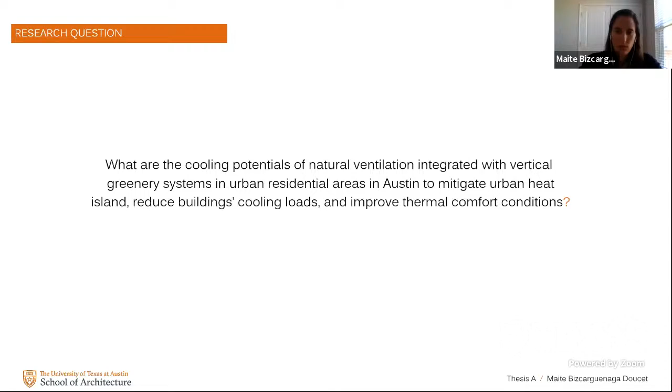My main topic of research is the cooling potentials of natural ventilation integrated with vertical greenery systems. My advisors are Dr. Faulkner and Dr. Vajreshwari. My main research question is: what are the cooling potentials of natural ventilation integrated with vertical greenery systems in urban residential areas in Austin to mitigate urban heat island, reduce buildings' cooling loads, and improve thermal comfort conditions?

My methodology was, this semester, focusing on the research and lit review, trying to analyze climate change, urban heat island, passive design strategies, greenery systems, and natural ventilation, and figure out and select my specific site to be analyzed. Next semester I will move on to modeling and simulation with IES VE software, starting with modeling the existing site conditions, then my retrofit proposals, and finally the simulation results, analysis, and conclusions.

For this presentation, I'm going to start with the problem and why this research matters, talking about climate change and urban heat island and their impacts on ourselves and the environment. Then I'll talk about the building typology I've chosen, why I chose this residential single-family retrofit project specifically, and explain my methodology for finding the site. I'll talk a bit about the proposal, mainly focusing on greenery systems and green walls, and conclude with my future steps.

Throughout the presentation, I'm going to take you through different scales, starting with the world perspective, going into cities, into neighborhoods, and all the way down to a single building. So to start with the problem: the Earth, our planet, is heating up, and it's heating up really fast.

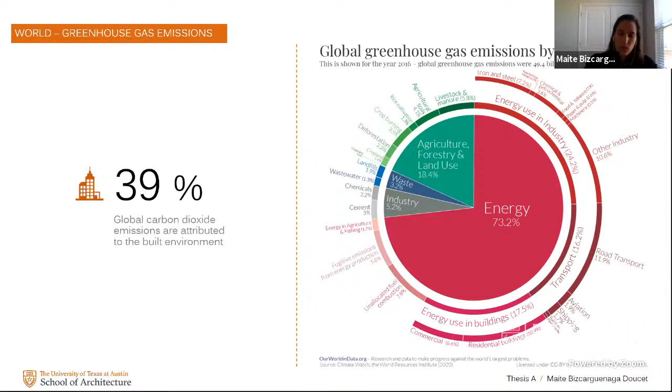As you can see in the graph here, energy is largely responsible for this, and 39% of global carbon dioxide emissions are attributed to the built environment. So we really need to take a hard look at the way we are building our cities and designing our buildings. This has caused long-term changes to our weather.

We have seen these extreme weather events with major increases in wildfires, in heat waves, in drought, with a 50% increase in severe storms, and floods—major floods have more than doubled.

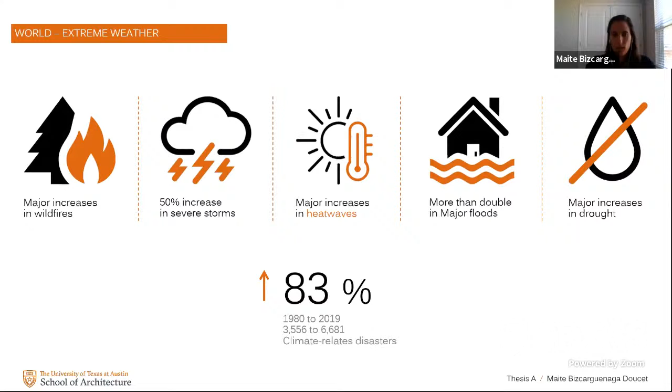With 7.8 billion people on the planet and 55% of the world population living in urban areas, this is really changing the way our environment is working. It's really the growing population density simply exacerbating environmental degradation, and with cities expanding and making more room for impervious cover, there's less space for nature.

Cities are particularly impacted by the urban heat island effect, which refers to higher temperatures registered in urban areas compared to their corresponding surrounding suburban and rural areas. This is largely due to land surface modification, human activity, vehicles, buildings, and materials, which differ greatly from the ones that we find in nature.

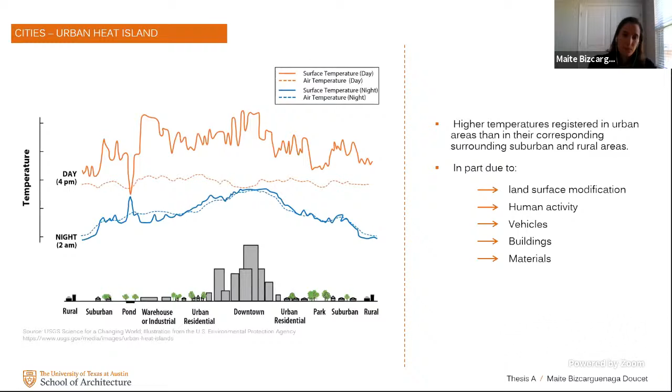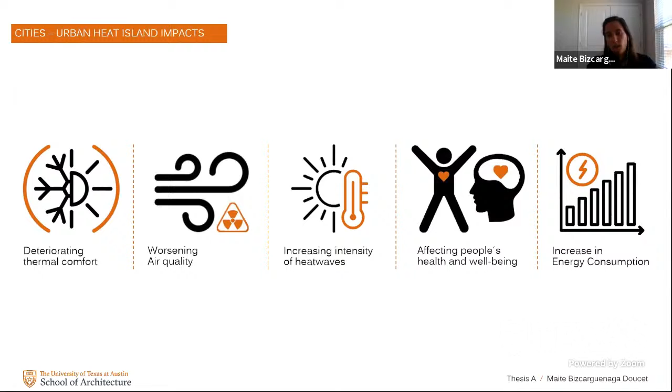This is really impacting us. It's affecting people's health and well-being, deteriorating thermal comfort, worsening air quality, increasing the intensity of heat waves, and really increasing our energy consumption.

The US has the third largest population, with 80% of its population living in urban areas, in more than 310 cities with population over 100,000 people or more. It's really, really important that we take a hard look and try to make cities a better place to live.

With about 140 million buildings in the US, while it's important to look forward and design better buildings and better cities going forward, it's also very important to look back at what we've done and the damage we have done, and retrofit the existing stock. That's why I think retrofitting is so important, and what better place to start than our homes?

So that's what takes me into residential buildings, to understand a little bit more. Residential buildings are among the top energy consumption sectors. As you can see in the US, while renewable energy has been increasing, it's still really dominated by fossil fuels, and residential is no different.

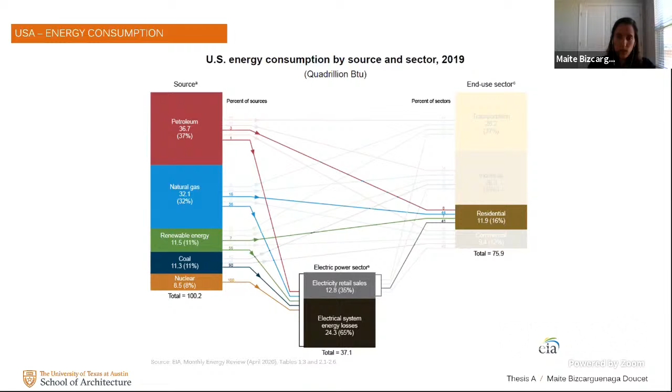Only over 7% of the energy used in residential is renewable energy, so we really need to understand and find ways to reduce that. Looking exactly at how it is that we are consuming energy in our homes, 32% is attributed to the HVAC system, for both heating and cooling purposes, being the largest energy consumer.

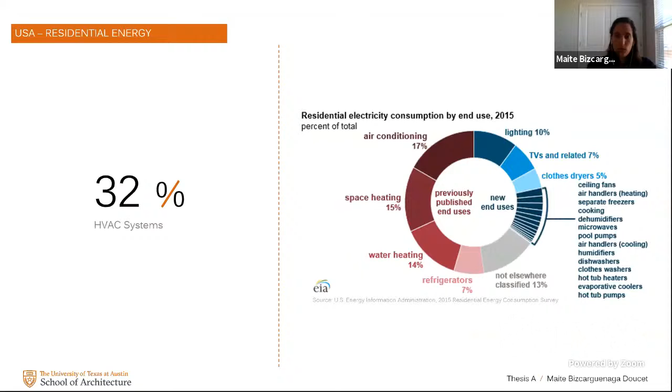In a survey done in 2015 by the Energy Information Administration, 1 in 3 households reported facing a challenge in meeting energy needs, and 11% reported keeping their homes at an unhealthy or unsafe temperature. This really shows how impactful and meaningful it is to go back and look at our homes, finding different ways to both retrofit them and implement passive design strategies to improve thermal comfort—reducing temperatures during the summer and increasing them during the winter.

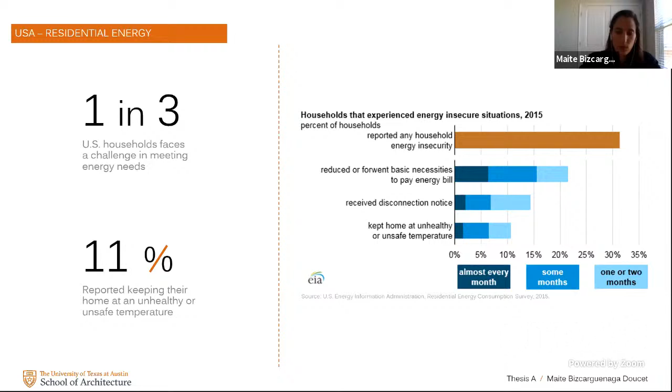That takes me to the site selection. So as I mentioned, I'm looking at Austin.

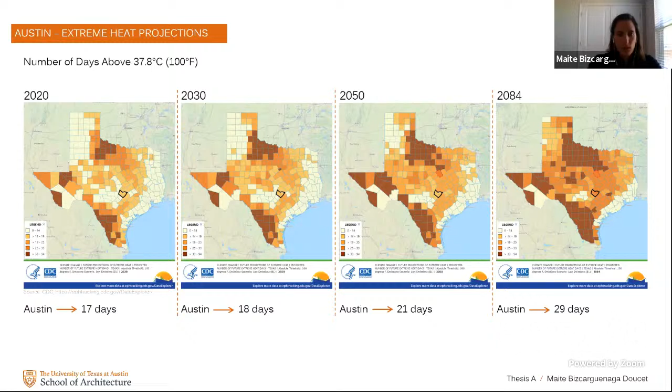Austin is considered to be a humid subtropical climate, categorized by long, hot summers, short, mild winters, and warm spring and fall transitional seasons. It's basically a cooling dominated climate, which with global warming is just going to continue to get hotter and hotter. As we can see from the projections from the CDC, the number of days above 37.8 degrees Celsius, the consecutive days above this temperature, are just going to continue to increase, making it very important to find different ways to cool our neighborhoods and our buildings.

That took me to this very interesting analysis by Bixler and Yang of climate vulnerability in Austin, a multi-risk assessment, where they analyzed the social vulnerability of the population in Austin, trying to understand where it was located, looking at people's age, income, education levels, and so on. On the other hand, they looked at the places that were receiving more heat, and matched that with places that had less tree cover, putting together those two indexes to create a comprehensive heat risk and social vulnerability index that I analyzed.

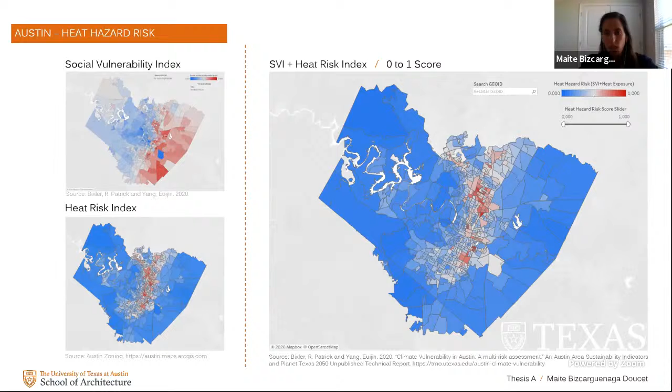I took that map and that research and overlaid it with the current zoning for Austin, because I wanted to understand where the single family areas were that were most impacted by heat and by social vulnerability.

So these are the ones when looking at the score. The Bixler and Yang index has a score of 0 to 1, 1 being the highest degree of vulnerability. I started by analyzing places that were in the 0.5 to 1 range. You can see, no surprise, it's closer to downtown and the more urban areas. I then increased it to 0.6 to try and reduce the number of areas and find a single one. That gave me 67 census block groups with a total population of 143,000 people and 52,000 residential units.

I really wanted to continue to narrow down and find a single location. To do so, I looked at the mean population and mean residential units by census block and eliminated the ones at both ends to try and find a more representative block. I also eliminated from the map locations that had only the social vulnerability index below 0.5, or only the heat risk below 0.5. That led me to these 26 census blocks.

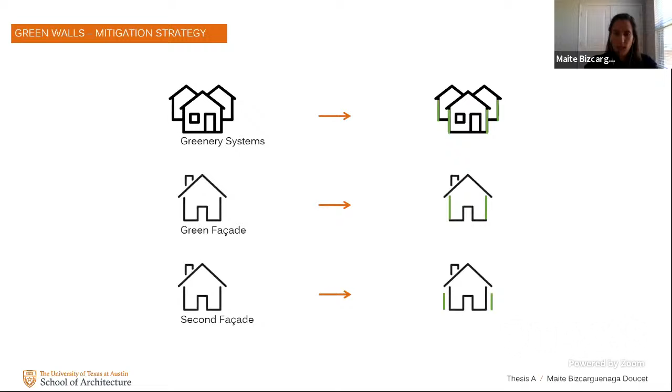I want to understand this shading and this second skin, and what the temperature will be between the facade and the green wall, and how the air that could flow in between would or wouldn't help reduce the heat that the house absorbs, therefore reducing its cooling loads.

So finally, my future steps are modeling this through ENVI-met software to really analyze this idea that I have. I'll be modeling the site, as I mentioned, and then modeling these different retrofit proposals and reaching my conclusions next semester.

For general anticipated findings, I expect the added greenery to reduce the urban heat island effect and improve the exterior air temperature, therefore improving the cooling potential of natural ventilation, decreasing the building cooling energy load, improving the environmental footprint of buildings, and overall improving human and other species' health and well-being. That is my general concept.

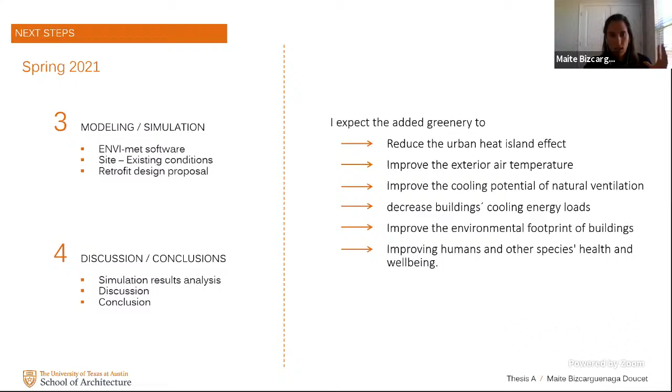Thank you. Great work, Maite. Thank you.

Could you go back to your site screen? Yes, or slide? This one? Yeah, I couldn't—on this one I know what site you're talking about, but I couldn't see the street names. Maybe for the others, you could describe a little more exactly where this is in Austin.

Yes, so let me go back here, downtown. So UT is about here, downtown is right there. So it's this little area right there, between First and 5th Street, and between Chicon Street and Pleasant Valley. Thank you. Yeah, no problem.

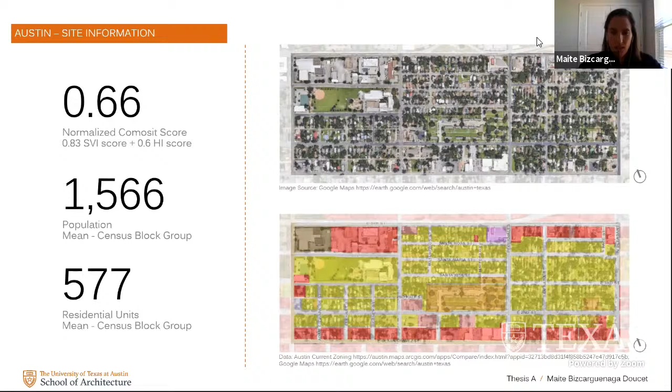Which my site, I guess, if I had any questions or wanted to pick your brains, would be a little bit on the site—if I go back a couple of slides, even if I go maybe here. I ended up choosing, so I narrowed down the different locations kind of very methodically, but when I really got to this last couple of spaces, of course I'm looking at single family residential, and that's the typology and the buildings I've chosen to analyze.

So that's why I ended up choosing that specific site, because it does have a commercial area, but it's not as big as—if you can see these sites up here, more to the north, they have a really big part of that area that has commercial, or big box areas. So this section right here has a big sports academy or something like that. It does make sense that the places most impacted by heat would be next to these big box or commercial areas, because they have such a big impervious cover for parking.

In that sense, it truly makes sense that this would be the area most impacted. I ended up choosing the other one because it had more single family homes, but ultimately maybe it makes sense to look at this other site—even though I'm not really trying to focus on commercial, it almost seems like the places more impacted by heat are commercial areas, more so than residential, which also makes sense, since you have front yards here and trees and whatnot.

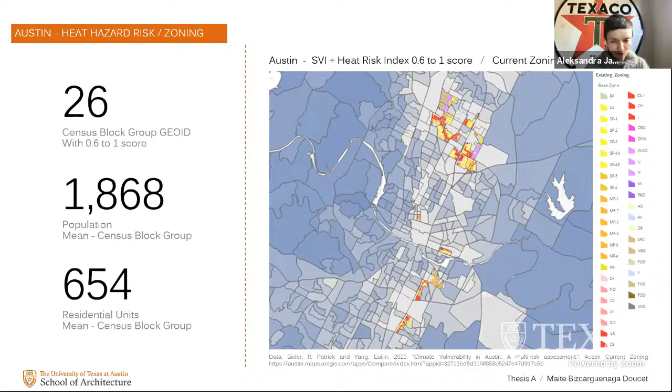Very useful, thank you so much. And definitely the cost is something that has been very present on my mind, I think, even looking at how people can't afford to pay their bills and everything. Reskinning the whole building and making it super airtight and changing your HVAC and doing all these things - those are all fantastic if you can afford it, if you have the time, if you can do that.

So I do think we need to find non-invasive ways to retrofit our buildings, and the wider range of possible solutions and passive design solutions that we can offer, maybe the more people really can start implementing them. And that is - definitely the cost is something that's really been on my mind. That's also why I'm not really looking at living walls, and focusing more on green facades.

It also has to do with the cost, so that's definitely a big part of it. I do need to start looking a lot more into ENVI-met, and that would be my next step—to really analyze how accurate it is and exactly how I'm going to be able to measure all that.

You should mention, Maite, she just got the software—she and Diamond—through a Green Fund grant, so they're just now going to start using it. They haven't had a lot of experience with it yet, but they've done a lot of research and a very thorough literature review about other projects using this software in order to calibrate it a little bit.

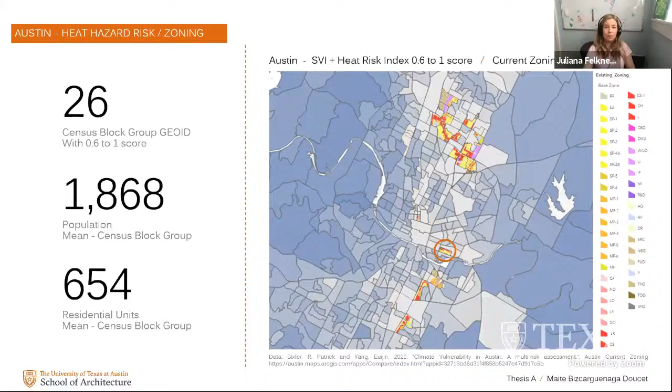I mean, here you expect that heat to happen, so you're better prepared than they are. And there's actually a higher rate of mortality, and people are highly impacted in those locations. So kind of looking at it from different views and different needs and comparing the two, I find to be super interesting. And I would love to have the time, but I'm not sure I'm going to have the time to look at it. Well, you've already done it in your lit review, and you've discovered that dynamic systems, so you can change between winter and summer for such cases, could be useful.

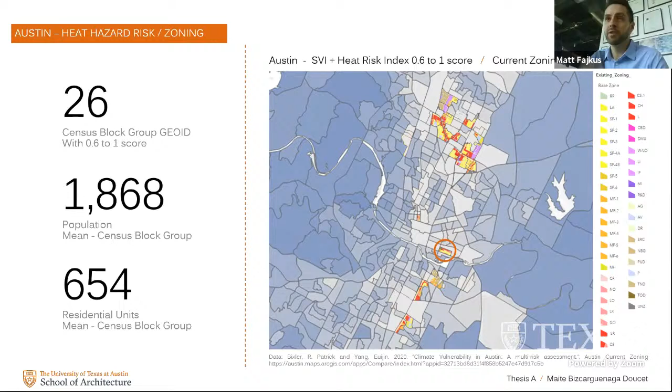If you could just sort of show some... I guess the part of the question is, is it a proportional relationship? That is, you add X amount of greenery and it keeps going the same way. Or is there maybe some sort of way that it begins to exponentially increase, having more impact, or the opposite, the temperature exponentially decreasing? If you just add a bit more greenery, that might be a very interesting conclusion to arrive at, or to disprove what I'm hypothesizing. Yes, definitely, we'll look at it that way. Thank you, great.

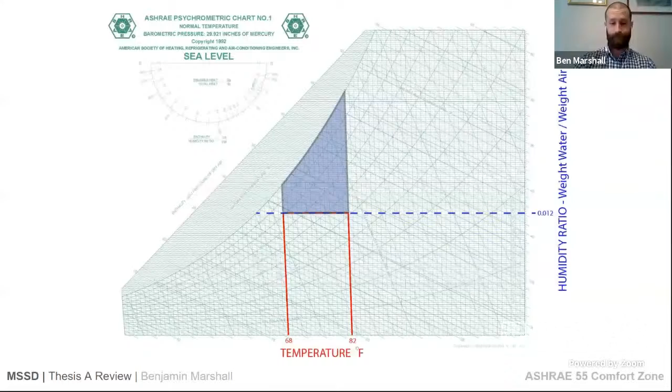Some of the other problems would include mold. Mold likes a lot of our building materials, and it needs to be humid to grow. It needs water to grow, and it also likes dim light, but that's for another study. The mold not only can degrade the building materials, but it also releases spores, which is bad for air quality. You get lots of people who are allergic to mold, I've got a good friend who's allergic to black mold, and it also gives you asthma and that sort of thing. You also can get water damage. If you get condensation on your building materials, it might not grow mold, it might just get water damage, which will degrade your gypsum board and other materials in your building construction.

So how do we get rid of this water vapor in the air currently? We use something called the vapor compression cycle for the most part. There are a couple different systems, but the vapor compression cycle is the most common for residential houses. How it works is that you pump refrigerant around a circle. You have an evaporator, which is the coldest one down here at the bottom, it is colder.

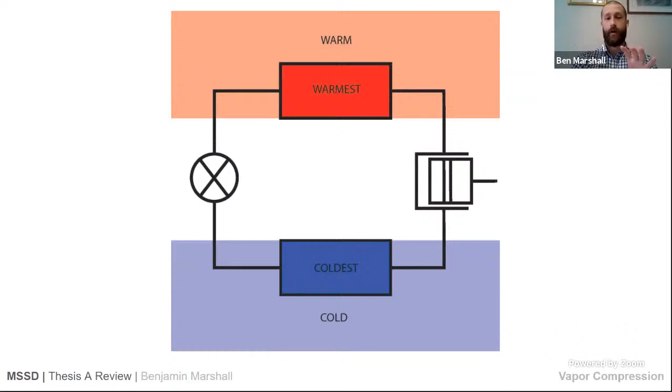The reason this works for dehumidification is condensation. Whenever the coil in your evaporator is colder than the air, water condenses on that coil and it pulls the humidity out of the air.

There are other ways to do it. Desiccants are one. If you've ever bought a pair of shoes, it probably has a little pack you shouldn't eat. Looks like a peck of salt, but it's actually silica beads - those are solid desiccants.

What we do in these situations is have a wheel that air with really high humidity is blown through. Those desiccants absorb it. Then as the wheel turns, the exhaust air from your building gets blown through those same beads as it rotates through, and it evaporates that stored water. But you have to add heat to do this.

Liquid desiccants are a similar process. They're just a solution - salt water, if very salty, will absorb water out of the air.

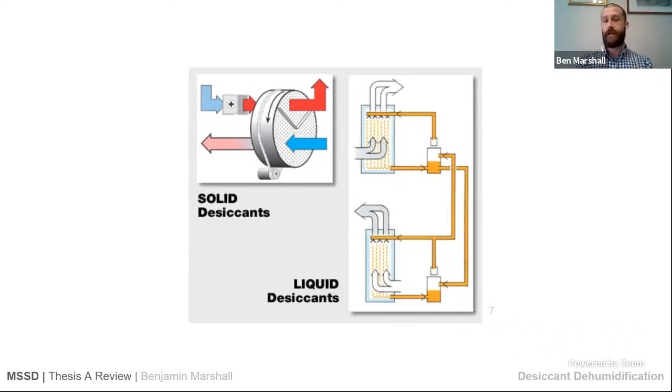It's a little bit better - actually supposed to be 60% better. The desiccant cooling is 60% better than vapor compression cooling.

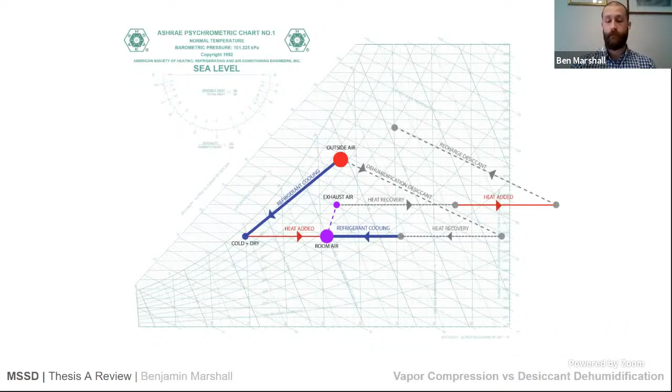But I think there might be another way. First, why do we dehumidify without cooling? Why would we use desiccants over vapor compression?

Well, efficiency is one thing. There are several technologies out there that don't do dehumidification, but are more efficient than our current air system.

Air is not very dense - you can move your hands through it. Water is a lot more dense, which means you need a lot less of it to move a ton of energy around. There are three different types of energy movement: convection, conduction, and radiation.

This is great, but it doesn't deal with humidity, and that's why a separated system that deals with humidity might make this a viable thing for hot and humid climates, which would save a lot of energy.

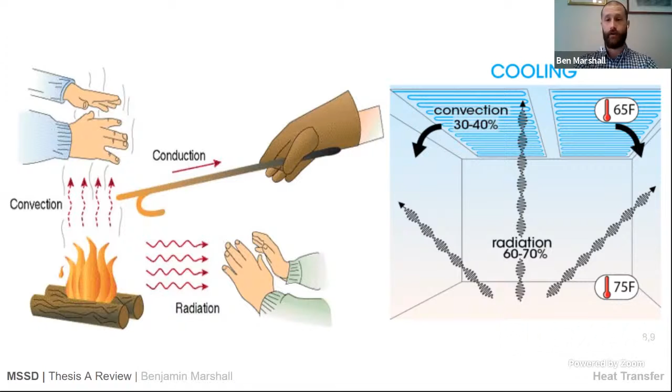This is some radiative panels - they look just like ceiling panels you'd have in your office, but they are your whole thermal comfort system, not just air conditioning. So it can be integrated into architecture very elegantly.

Another system is the TAC wall system developed by NREL, the National Renewable Energy Lab, and Oak Ridge National Lab. It's a series of pipes inside your exterior wall that turn your whole wall into a heat exchanger. If you set up your insulation correctly, you can direct heat from the exterior to the pipes rather than all the way through into the interior, which would decrease your heating and cooling costs.

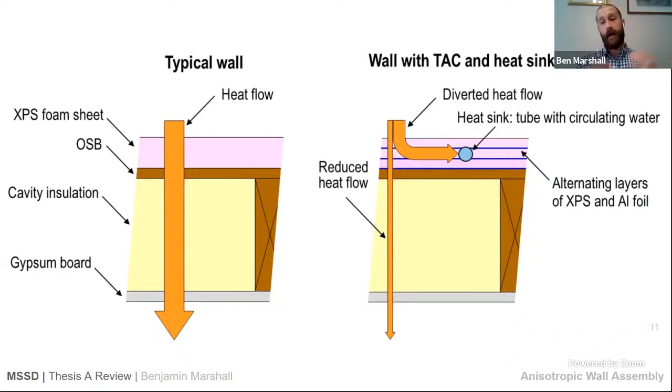But it doesn't have a way to deal with humidity.

Another reason we want to separate dehumidification from the standard vapor compression cycle is because there's a lot of time in the year where the temperature falls right where you want it, and you have to subcool that air before it can be reheated up to your room temperature. So you're losing a lot of energy.

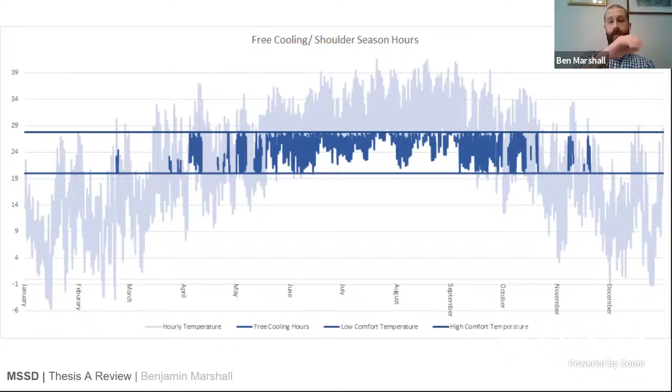We have about a 13% difference in the worst case scenario, which is the A2 scenario, but it's still a large chunk of the hours of the year in which this free cooling is available.

So how do we solve this dehumidification problem differently than the way desiccants have done it? Well, maybe nature has a way that it's already been solved. Throughout history, people have looked at nature and said that's already been solved by nature. Let's just try to figure out the principles behind how nature does what it does.

So lotus leaves, these are super hydrophobic, which means they don't like water. Phobic means not liking or scared of. And so water beads up on the surface and rolls right off. And there are already some coatings that do this.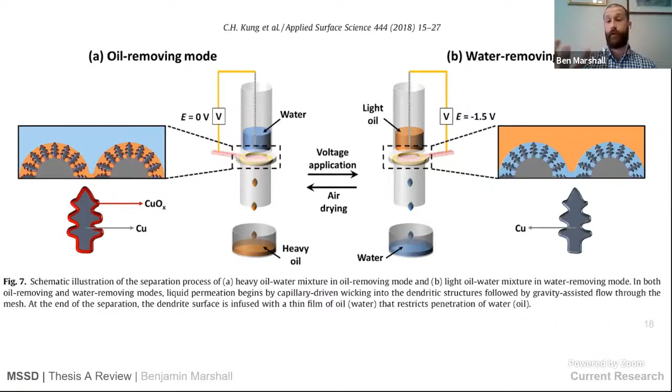It really likes water. It pulls water into the mesh. It does it by this quick formula. Fairly simple: you add the 2 electrons, it breaks them apart, and you start to get some negative hydroxide ions, and everything kind of pulls in towards that mesh.

So what about being able to, it's great if we can just soak some water in, but what about getting rid of the water? Well, the hope of my research is that there is an electrical perfect spot where you can cycle between super hydrophobic and super hydrophilic properties of this mesh, so that the water pulling in gets pushed out, forms droplets, and gravity starts to pull it down the mesh, and it drains away just with the force of gravity.

This shows the test that they did on their mesh sample, and there is such a point where if you modulate the frequency, it looks like around 7 or so hertz, that's cycles per second, you get this effect.

And at around 30 to 32 phase angle, you can get it to cycle between the two.

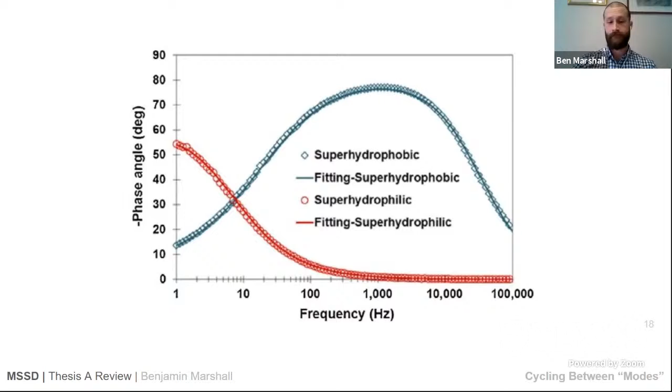So what have I done to date to start this? Well, I got a mini materials grant from the School of Architecture, and they bought these materials for me to start making this mesh. I have made some for testing.

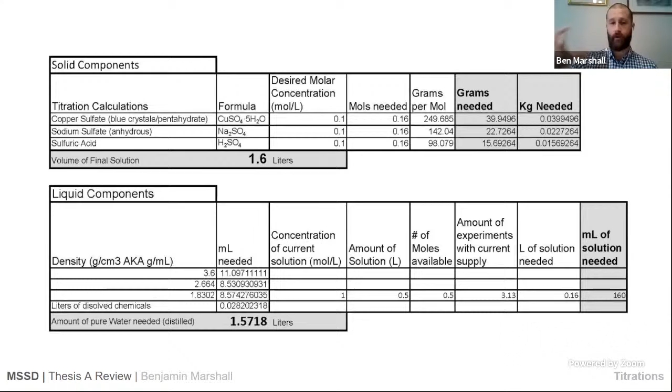So I figured out, based on the paper, how much I needed per batch. Here are some titration calculations. Filled it all up.

Mixing it up outside. I'm wearing a mask because I'm dealing with some sulfuric acid. It's very mild, but it is just a little bit, so that's why we did it outside and I wore a mask.

So we've got a DC power supply. We're using it to supply the correct amount of electricity that the researchers in Canada used to make their mesh. And we've got samples—these ended up being correct as far as the electrolyte solution. I also have a bunch more samples that were an incorrect solution, but I kept them around because if I have time, I'd like to test them as well.

And I'm in the process of building a testing apparatus, which is fairly simple. It's two pieces of PVC and a blast gate, similar to what you'd have in a shop, so you can close off or open vacuum to a tool to suck away your dust.

And I've got a little signal generator there, and I'm going to use that to do the Hertz calculation, or the Hertz experiment, like I mentioned earlier.

I'm working on developing with my cousin, who's got a 3D printer, a little blast gate that I can use to put the samples in and electrify them. You can see those two channels for electrical wires so that I can run them to the signal generator.

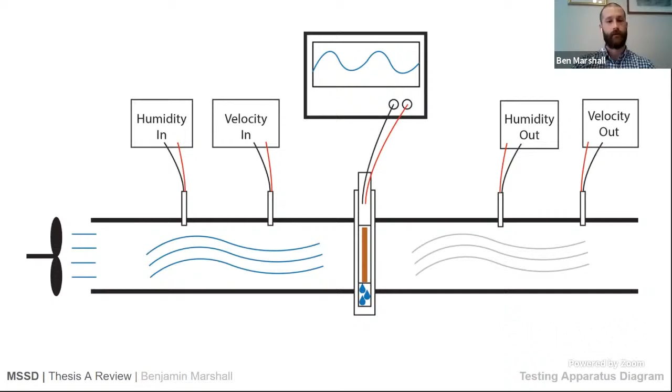All right, so this is the School of Architecture, not a school of material science. So how does this apply to architecture? Well, there are architects who think that the skin of the building should be a big part of how we treat the outside, maybe how we do the structure—the skin of the building is the most important part. I am beginning to think that way as well.

Here are a few examples of projects that touch on this. One from our own Professor Ficus, for his firm's submission to the Habitat for Humanity 20 by 20 dwelling, in which these blocks on the outside not only form a screen for privacy and light modulation, but also filter air.

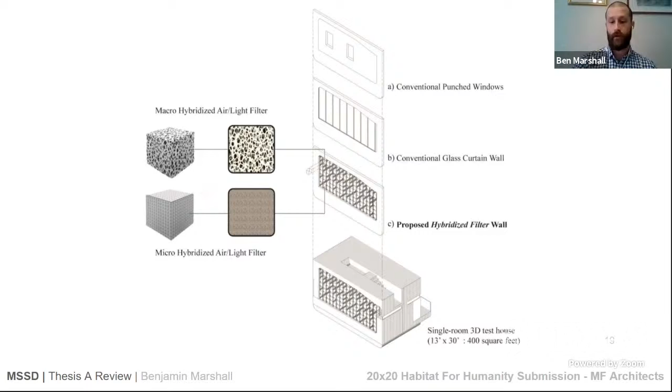This is all kind of in theory. One building that has gotten built, which uses the skin as the interface for thermal comfort, is the Philologische Bibliothek in Berlin. This is by Norman Foster, and the skin of the building is where they have the lights and the HVAC system and that sort of thing—it's the structure for the building.

So I think it'd be great to have this screen system that I am researching be integrated into the architectural aesthetics of a building, and not just stuck away inside some closet somewhere where you can't see it.

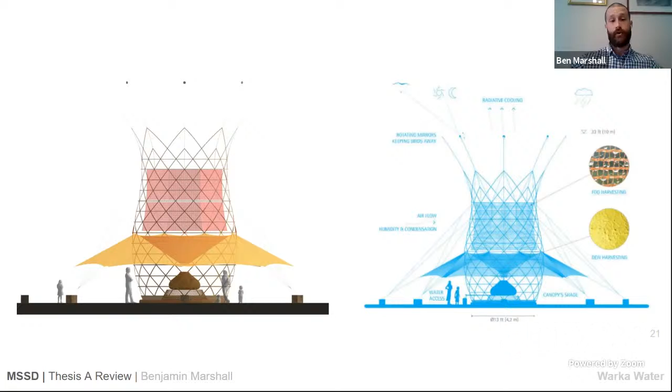Also, another way this material may be used is for water harvesting. There are a lot of places far from water where people have to walk a long way to get to it. This is a project by Warka Water, in which they made, not only in digital form but also physical form, architectural installations that collect water for the village.

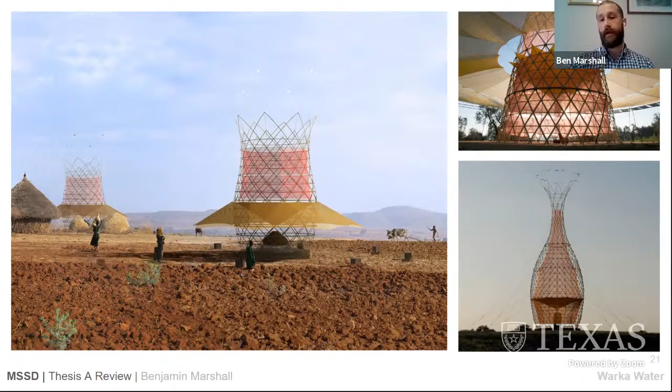The two on the right are in-place installations in which this netting is used to capture fog and provide water for the village, so people don't have to walk so far to get to water. Another is a fog tower, which is architectural, not really supposed to be lived in—I think this is more for agricultural purposes.

But that is my project to date. Any questions?

Ben, could you clarify what that scale jump was? A big scale jump from the experiments up to what you showed for some of the case studies. Do you imagine that your final output would be... I guess there's two ways to ask this question. More fundamentally, I'm asking, how much more of the experimentation do you imagine doing?

Are you suggesting that it would be somewhat of an analogous exercise, or some sort of metaphor that's scaled up to the building size or building scale? Or is it possible that you imagine developing it at this very small scale that could be just literally applied and scaled up as a building skin? It's unclear to me offhand what you imagine the final output to be, exactly how far you're getting with the material study, which is really interesting, by the way.

And the argument, the way you build up to the argument that you're making, all of that was convincing. The most unresolved or unclear part is the last bit with the case studies, which are also interesting, but not as clear of a continuum, as though you were then trying to make that leap that maybe you don't. Well, I'll stop leading the witness here and just let you answer that question, and then I might give you some thoughts on that.

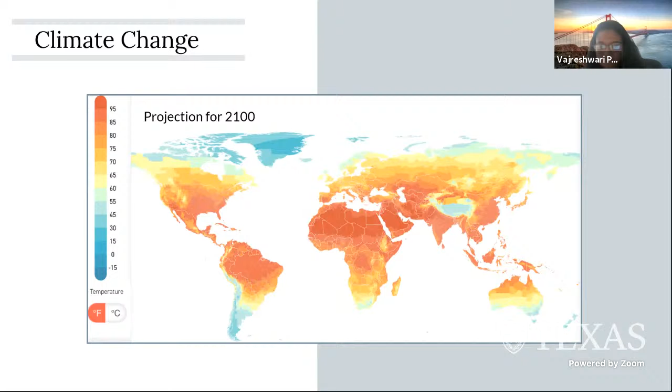Next is population projection. The global population is projected to surpass 8 billion by 2030 and hit 9.8 billion by 2050. The growth of urbanization has been extensively accelerating, and 50% of the world population lives in urban areas. India will soon become the most populated country in the world, with population expected to grow until mid-century, increasing to 1.6 billion by 2050, and 70% of that increase will be in urban areas. According to research, this phenomenon could cause disasters in low altitude areas in Asia, which are expected to experience rapid population increase.

Greenhouse gas emission: today we collectively emit around 50 billion tons of CO2 each year, 40% higher compared to 1990, and 73% of it is from the energy sector. In terms of CO2 emission, India is the 3rd largest emitter of greenhouse gas after China and the USA. Continued high emission of greenhouse gas is projected to lead to a 4 degree Celsius rise in average annual temperature in India by 2100.

Coming to energy consumption, the global average per capita energy consumption has been consistently increasing, by approximately 45%.

The fastest growing building energy consumption through 2040 will occur in India. Delivered energy consumption for residential and commercial buildings in India is expected to increase by an average of 2.7% per year between 2015 and 2040, more than twice the global average increase.

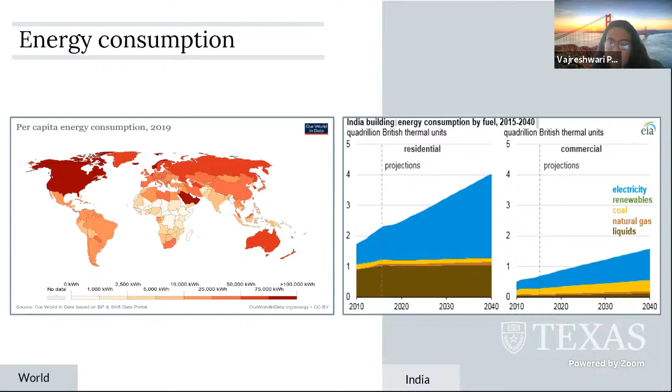Air conditioning is a major consumer of energy in the residential and commercial sector in India. Looking into the air conditioning system in India, about 2.8 billion people living in the hottest parts of the world, only 8% has air conditioning, compared to 90% of the people in US and Japan. India has among the most cooling degree days in the world, more than 3,000 per year.

Household ownership of AC in India is merely 7%, that is approximately 20 million, and demand is expected to increase to over 1 billion by 2050. But many devices will be low cost and inefficient models that will only consume more energy, powered by fossil fuels that will contribute to global warming.

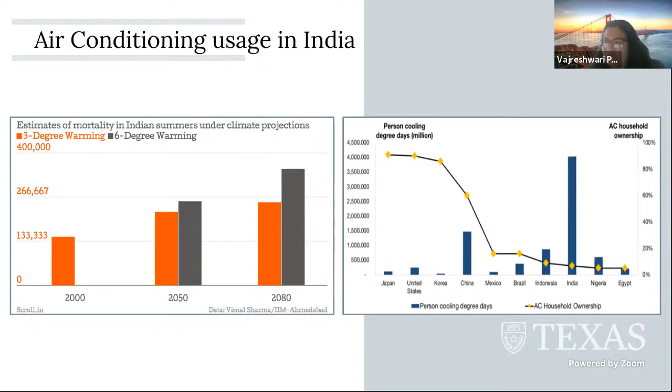Air conditioning currently accounts for about 40 to 60% of power demand in summers in major Indian cities. India contributed 5% of global annual emissions from ACs in 2019, predicted to account for 25% of annual emissions by 2050. So what is the urban heat island effect?

All these parameters led me to look into the urban heat island effect that major cities are experiencing. As you know, urban heat island effect is best visualized as a dome of stagnant warm air over heavily built up areas, and majority of the cities are around 2 degrees Celsius warmer than rural areas, with commercial and high density residential areas hotter by 5 to 7 degrees Celsius.

Looking into the causes of UHI, there are many causes like low albedo materials, heat loss from street canyons caused by the obstruction of sky by buildings, trees and other objects, air pollution in the urban atmosphere, the release of anthropogenic heat, the heat storage capacity of building materials, and decreased evaporation.

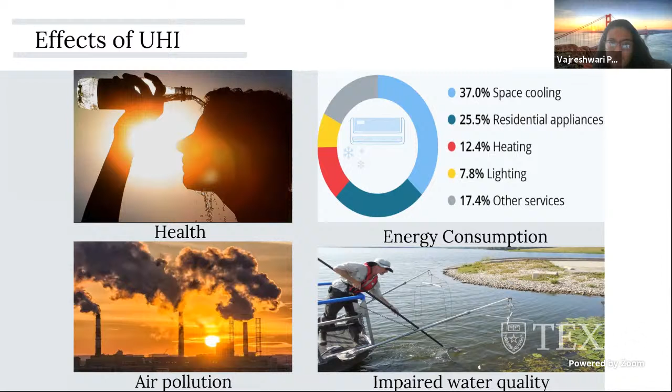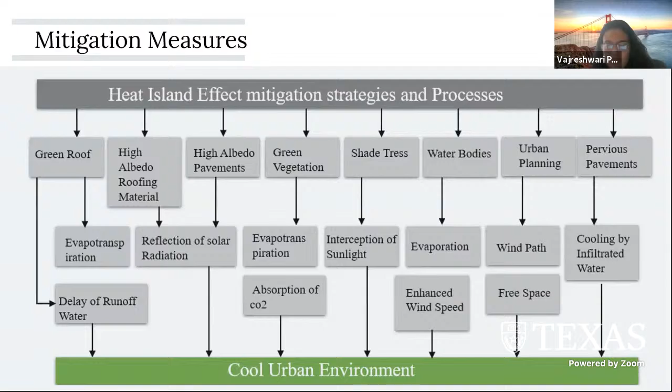There are many effects of UHI: health effects, energy demand, impaired water quality, and air pollution and greenhouse gas emissions. Looking into mitigation strategies, there are many adopted for UHI, but more specifically I'm looking into green roof vegetation.

Then looking into the material on the surface, and third would be the urban geometry. Coming to vegetation, I want to look into the green roof.

According to the study, the surface temperature of an individual green roof can be reduced by 15 to 45 degrees Celsius compared to conventional non-green roofs, and the nearby air temperature could be reduced by 2 to 5 degrees Celsius, and could also reach 80% depending on the building type.

If extensive use of green roofs is undertaken in urban areas, the air temperature at pedestrian level could reduce by 0.5 to 1.7 degrees Celsius. Looking into the tree shadow advantage, tree-shaded streets could reduce air temperature between 0.9 to 2.6 degrees Celsius.

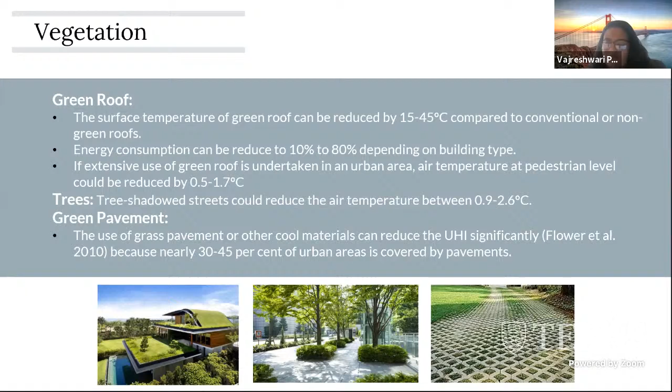The highest benefit of shadow provided by trees is improving local thermal comfort during daytime, especially in tropical and subtropical regions. Regarding green pavement, urban pavements are generally made of materials that can reach peak summer temperatures of 50 to 70 degrees Celsius. The use of grass pavement or other cool materials may reduce UHI significantly because nearly 30 to 45% of urban area is covered by pavements.

Looking into materials, cool pavements have several advantages - they are able to keep urban temperature lower overnight - and cool roofs. Studies have shown that the expected decrease rate of urban ambient temperature varies between 0.12 and 0.2K per 0.1 increase in roof albedo, with a value close to 0.2K.

Looking into urban geometry, urban canyons can reduce total energy consumption by 30% in commercial buildings and 19% in residential buildings. Indoor and outdoor temperature difference shown by a study can peak at 5.4 degrees Celsius for unshaded buildings, while tree-shaded buildings did not exceed 2.4 degrees Celsius. A study established that street design influenced thermal comfort at pedestrian level and global energy consumption for urban buildings.

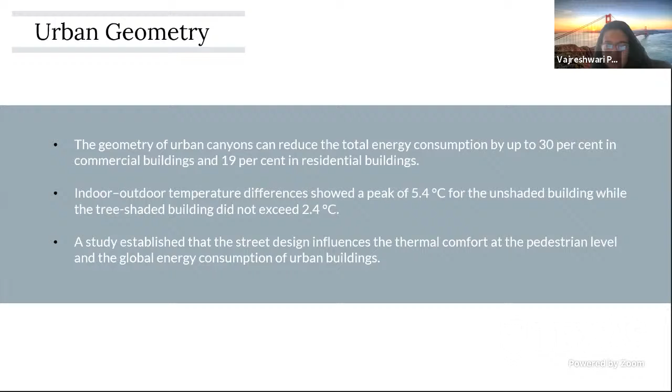Now comes to the site which I've chosen, that is Bangalore, situated in India. Bangalore is located in India, it is one of the fastest growing cities, and it is the Silicon Valley of India with rapid growth in information technology, biotechnology, and manufacturing sectors.

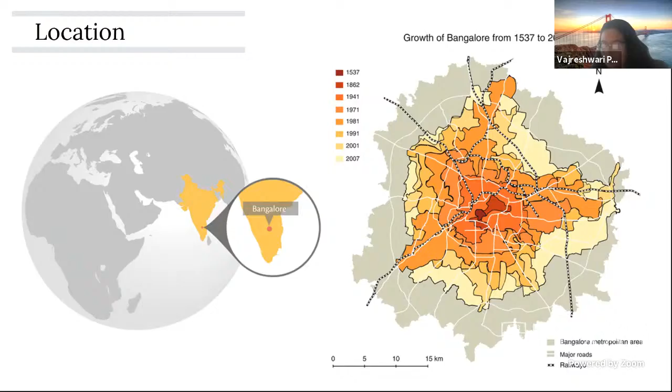About 35% of the IT workforce works in Bangalore, and the spatial extent of the city increased from 226 square miles in 1949 to 286 square miles in 2020. These are some images just to show the sense of the city.

Coming to the climate, the city is placed in a warm, humid climate zone, and Bangalore has a tropical savanna climate with distinct wet and dry seasons, with an annual rainfall of 35.6 inches. Due to high elevation, that is 900 meters above sea level, the city usually enjoys a more moderate climate throughout the year. The coolest month is January with an average low temperature of 15 degrees Celsius, and the hottest month is April with a high temperature of 35 degrees Celsius.

The average annual percentage of humidity is 63%, but it varies from 32% in the month of March to 87% in August and September.

So if you look at the population, in 2020 the current population is about 12.3 million, and a 3 to 4% increase is happening each year. By 2031, the city will have 20.3 million people. Population density is approximately 6,500 people per square mile.

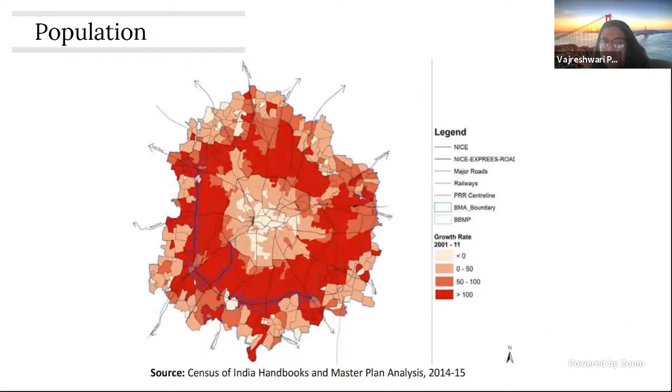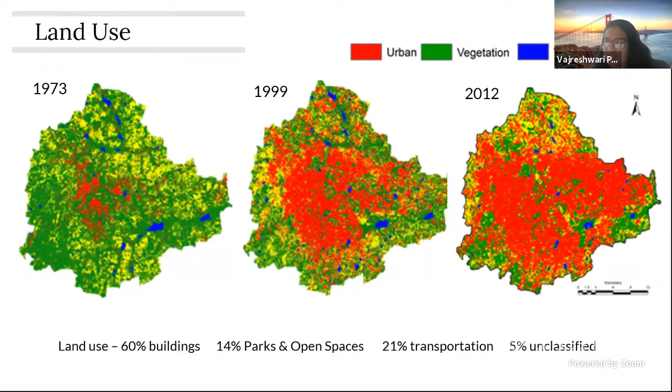To look into the land use, Bangalore has been experiencing unprecedented rapid urbanization and sprawl in recent times, with unrealistic land cover changes and a stringent increase of paved surface. There is a sharp decline in vegetation by 32% from 1973 to 1992, by 38% from 1992 to 2000, and by 63% from 2002 to 2009.

There is also a decline of water bodies. Before there were 265 water bodies present in Bangalore, but now you can see only 98 water bodies, most of which were encroached upon by slum areas.

So the environmental issues that the city is facing include air quality. Bangalore's air quality worsened by 7% in 2018 compared to 2017. This puts Bangalore at up to 4 times the World Health Organization's annual limit. As a result, studies have shown a rise in blood pressure, inflammation, heart attacks, and strokes.

Air pollution is a major hazard the city has been facing, with a consistent increase in vehicular population at an average rate of 8% per annum. The greenhouse gas footprint is 19.7 million tons, and the major contributor sector is transportation at 43%, domestic at 21%, and industrial at 12%.

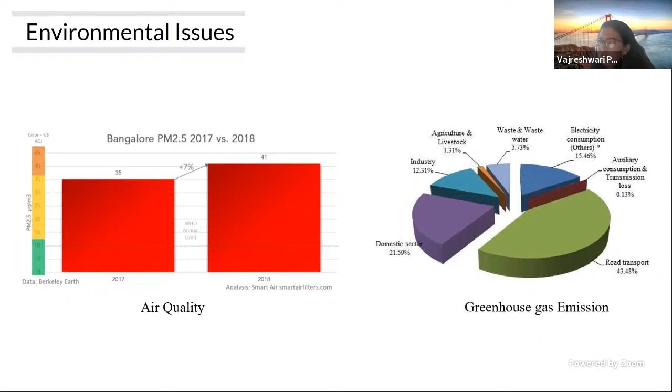Another main contributor to Bangalore's emissions is energy use. The energy component is 60% of the total carbon footprint, with electricity usage in residential, commercial, and industrial sectors contributing about 75%. Residential buildings consume 33%, while commercial and industrial consume 30% and 29% respectively. Emissions from municipal solid waste constitute the remaining 10%.

All these issues are contributing to the urban heat island effect, and the city is experiencing a surface heat island effect with a temperature variation from 1 to 7 degrees Celsius within different land covers. Additionally, as urbanized land continues to increase in areas which induce the UHI effect, increased temperature may cause an increased risk for heat-related illness and fatalities.

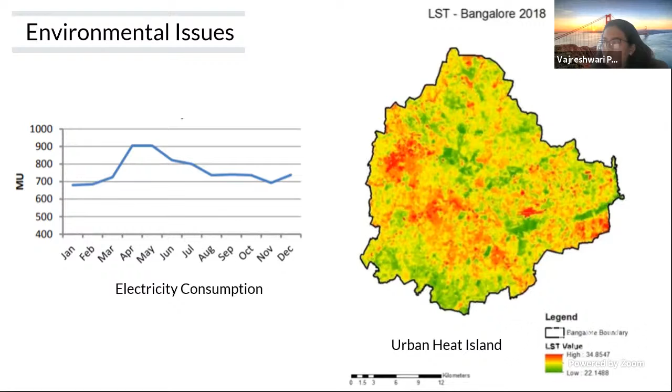Bangalore is getting hotter. A report by the Bangalore Climate Change Initiative says that the city's temperature would increase by 1 to 2 degrees Celsius from 2021 to 2035.

So in conclusion, UHI is a rapidly growing issue in urbanizing India. Additionally, mitigation strategies are required which can help in diminishing the impacts on climate warming. In the coming years, it will be important for city planners in areas such as Bangalore to determine how to maintain vegetation greenness in order to minimize harm to vegetation and not amplify the UHI effect, as fewer studies have been done analyzing the relationship between indoor climate and the physics of the building interacting continuously with the outside climate.

Coming to the future studies, I narrowed down 3 sites: one would be a low-rise building, one will be a low-rise and high-rise mixture, and one would be the compact building. All these sites have experienced the UHI effect.

I would like to analyze different percentage scenarios of grass, trees, and green roof, and a mixture of both, as well as materials such as cool roof and permeable reflective pavement. For outputs, I will be looking into hourly temperature, wind speed, relative humidity, and energy used in a building using the ENVI-met model. Thank you.

Could you go to the last slide? Sorry. Okay.

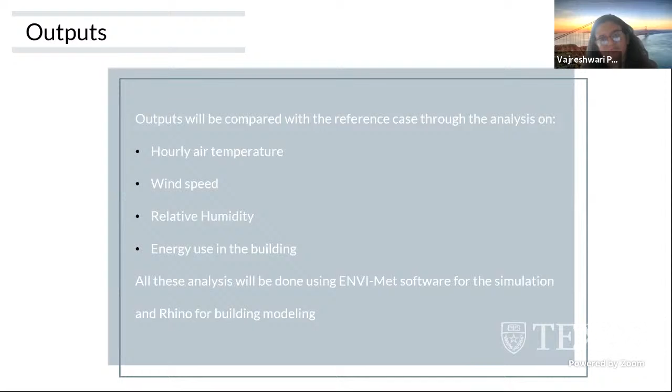Okay, and I think that's a great goal. If you wouldn't mind going back one more slide here. Yeah, this one. I'm interested in how you plotted out the scenarios and how you're going to apply them in practice. Is this a study for every permutation of about 10 or so variables, controlled for modifying one at a time,

or are you looking at a scenario of one item from line 1, one item from line 2, and one item from line 3 put together in some hand-picked combinations? Or how are you going to approach the study of the scenarios you're looking at?

Yeah, this is just the numbers I provided at the beginning, but I'm going to look into it by doing a permutation combination, and which might be the most effective according to the results I get.

All right, I think that's a really good strategy, and I'm not sure how many sub-variables this ends up leading to, but if you also had 3 different sites you were looking at, that's starting to become a whole lot of different scenarios, which is great.

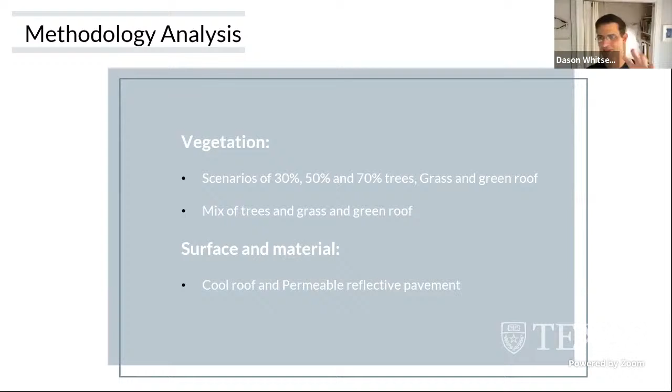I think if you set it up in a really systematic way, you could have a guidebook for how to mix and match these different strategies to come up with the most effective solutions, rather than somewhat arbitrarily handpicking this and this together, and then this and this together, where it's harder to draw real conclusions about what's driving the changes.

I was also wondering how you would decide where those particular strategies could actually be applied. I assume when we talked about retrofitting versus other solutions that are more difficult to implement, we should also be talking about that, right? Or are you imagining just covering everything? What's your strategy about those scenarios?

And how realistic do you want to be about it? Is this related to some kind of master plan for the city, where you know how the city is going to evolve and you want to tap into that? Can you talk a little bit about that?

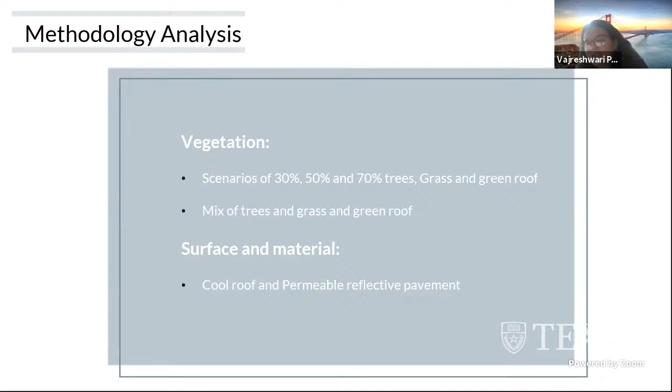Yeah, right now I was thinking of using an existing site, which is already a built-up area. So in that site, how to reduce the temperature in the existing environment, which they're already experiencing as heat.

So in that case, maybe it would be interesting to rank these different possibilities according to feasibility, since you're talking about a place that is already built up, not built from scratch. It might not make sense to look at strategies that are really difficult to implement. Maybe there's also a correlation between cost and feasibility, which could help you understand which strategies to test first, and maybe limit them based on some kind of criteria like that.

Diamond, I had some similar thoughts to the previous comments. I worry about defining this—it's very ambitious, which is great, and has potentially large impact, but could become difficult to get much mileage on within the scope of this remaining semester. The bigger question is what is the primary focus? Is mitigation of urban heat island effect too broad, or could you restate your question? What's the research question again?

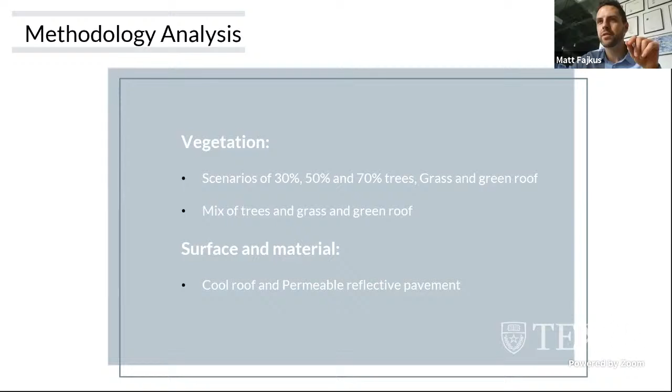Mitigation of heat island effect by utilizing urban vegetation and surface cover material, by analyzing the scenario to evaluate thermal comfort and energy consumption of the building.

Concrete, okay. So among these sub questions, it begins to talk about form and surface. By talking about urban, I'm not sure what you mean by morphology—like the layout of the site? Okay, it's spatial, I think you wanted to write spatial.

So formal versus material, which gets back to Dayson's point about isolating those variables. I think a matrix is an interesting way to talk about that—variation in one axis being morphology or density, and the other being material choice, like white roofing versus green roofing. Having these variables and beginning to isolate them helps establish what priorities there might be, because I worry about the big question being too big.

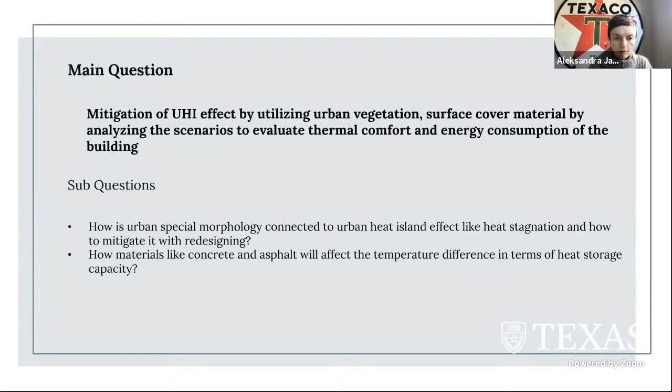Yes, I agree. This is a very important topic, and I applaud you for looking into it. I was really impressed by your findings about the increase in air conditioning use into the future, the increase in temperatures and the population and CO2 emissions coming from India in the future. So it's major what you're looking at, and I understand the tendency to want to find the ultimate combination of solutions to have the most impact.

One thing I really found my personal interest in, what Diamond is doing, is that she always said she wants to have a major impact for her country. So I think that's a very noble goal to have.

This software is very powerful, that Diamond discovered and that she and Maite are going to troubleshoot together. It can do building level, it can do urban level. The reason they chose it was because they both had a common interest early on in looking into the impacts of vegetation, which other software packages couldn't look at. White roofs and other kinds of material properties, other packages could handle, but the wind through the different morphologies combined with the vegetation was something that originally motivated Diamond to seek out this software, which they were successful in getting a grant to purchase.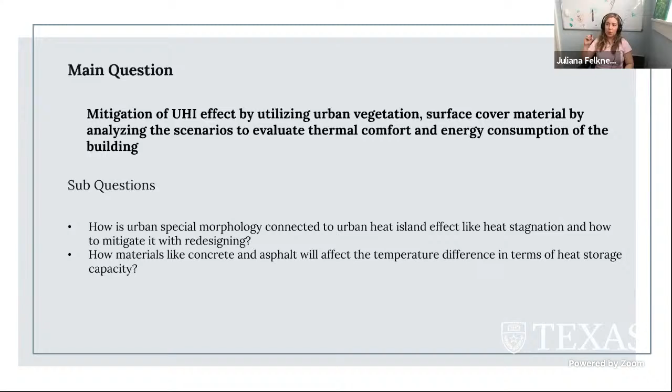One thing unique about Bangalore that you showed, could you go back to your temperature slide? Unique when I compared to Austin, where you showed the nighttime and daytime temperatures. That's a pretty big difference, isn't it? If we look at April, compare the daytime versus the nighttime. So I'm thinking you could do some kind of night cooling situation in some of the taller buildings. Not to add another variable, but it is a unique situation that we don't have here in Austin.

So I agree with the other input that you might want to try to find exactly this climate and look and see what other solutions have been found. But also look for getting in contact with professors in this region and see what they're looking at. I know you tried to reach out earlier, but to get some feedback from people working in exactly this city would be useful.

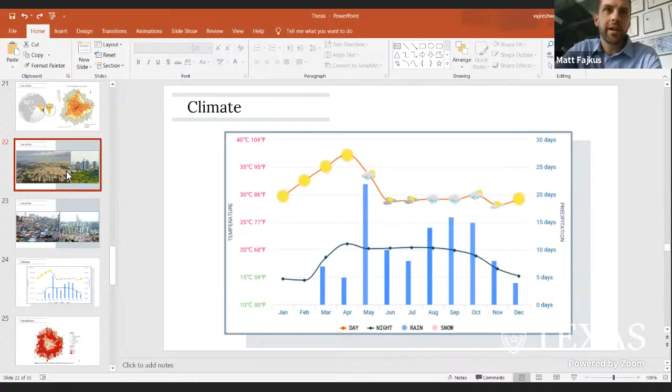One thing I've noticed, Diamond, if you go to the first location image, the one where you're showing an aerial of Bangalore, slide 22, right? It occurs to me that there obviously are some areas that are a lot greener than other areas already within the city. I'm not sure what your access would be to determine energy consumption or relative temperature points in different parts of the city, but you could imagine being able to speculate a bit by seeing a difference already.

I would just imagine if your general hypothesis is correct and what we generally understand about urban heat island effect, I think one would expect there would be some fairly different microclimates within this city already. I'm not sure how far you could get with that, but that might already start to set up the argument.

But this builds upon a lot of what's been said. If you were to distill this down to, for example, being able to explain the value of one tree in this city—I'm thinking of an example where I was walking a project site once, and we were looking at different ways to adapt a given structure and do adaptive reuse of a building on a given site. I recall that the strategy to work around a given tree on the site meant the foundation would need to be modified, and it would cost on the order of $20,000 more, as I recall. Not an insignificant amount.

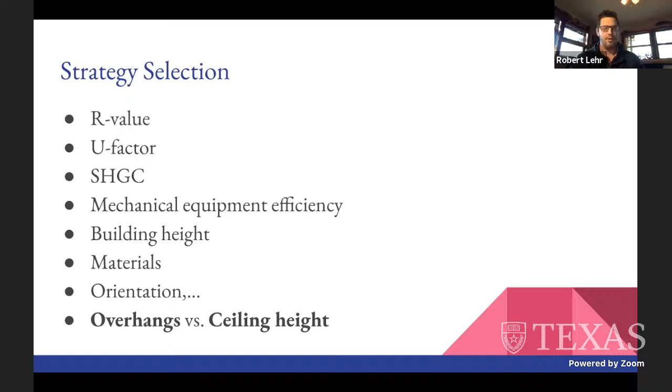I chose overhang and ceiling height factors, but there were many other building characteristics I could have analyzed. Before narrowing down, I wanted to model a full building information systems model incorporating all these different factors, but I realized that would result in over 19,000 different scenarios, and I wasn't equipped or experienced enough to do an accurate model for all of them.

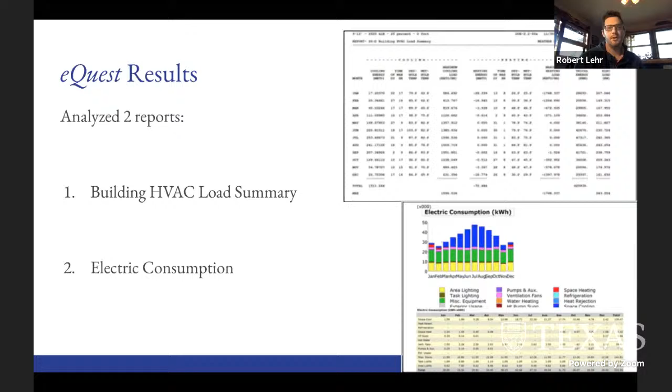The results from these simulations focus on 2 particular reports: the building HVAC load summary and the electric consumption. I'm not expecting you to read this, I'll show you the graphs in a moment. These are the reports generated from the electric consumption.

This is just a selection from one of them, showing that space cooling is the most intensive, then miscellaneous equipment is the next most intensive, and then area lighting. So these are the 3 I focused on the most to compare.

These are some of the graphs, the results. What you see on the left is difficult: I'm comparing the baseline model, a 9-foot tall floor to ceiling level with 0-foot overhangs, to still a 9-foot tall ceiling with a 3-foot overhang, and then an 8-foot tall ceiling with a 0-foot overhang.

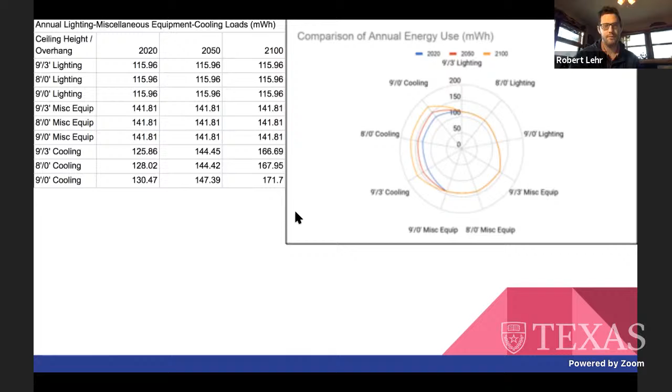But by 2050, cooling is going to surpass that energy required, and by 2100, it's going to get far more severe, the need for cooling, the energy use. And then the other report analyzed was the HVAC load summary.

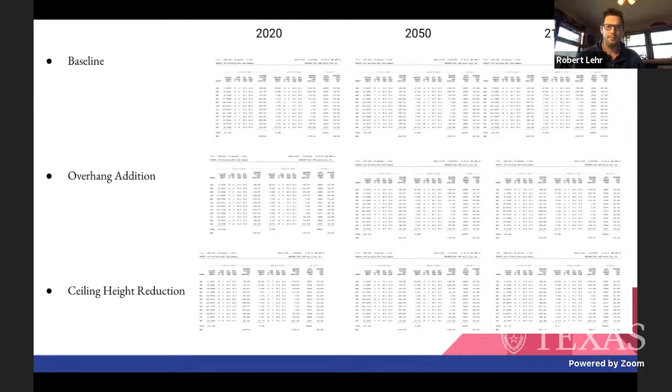This showed a monthly breakdown, showing the cooling energy, the maximum cooling load, the heating energy, the heating load, and same with electrical energy and maximum electrical load.

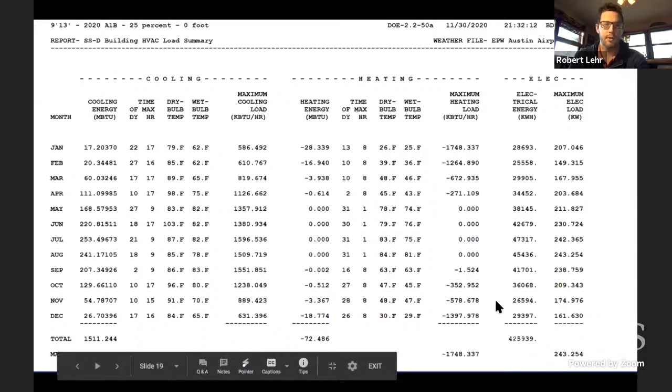From these results, I looked at the heating energy here. This was showing the amount of energy reduced, and this may be flipped in your mind, but the 1 foot ceiling height reduction reduced almost 10 MBTUs in 2020, and it's slightly less. This is in comparison to the baseline.

So this is how much more energy is reduced to heat the room. Whereas the 3 foot overhang, as is intuitive, increases the amount of energy to heat the room. My intuition for that is that during winter, the overhang blocks the solar radiation gain, so the heating for the space needs to go up, which normally would not occur if there's no overhang.

For the cooling energy, a different phenomenon occurs: the 3 foot overhang outperforms the 1 foot ceiling height reduction by a substantial amount in 2050 compared to the other two. This is an interesting phenomenon in the model scenarios, as I would expect a continuous increase or decrease in the amount of energy or power used from 2020 to 2100, except 2050 was an anomaly that needs more investigation.

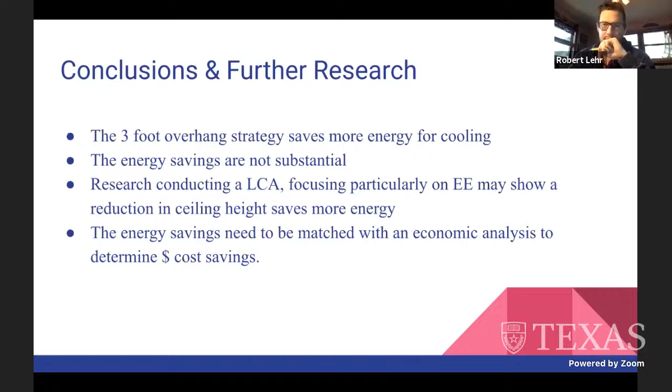So you looked at cooling, heating, and lighting - your electrical would mainly be lighting, right? This is the cooling power, and even putting aside the 2050 scenario, there was less cooling power. This represents how much less cooling power is needed in the 1-foot ceiling height versus the 3-foot overhang, compared to the baseline, which is the horizontal line. Whereas for the cooling energy required, the 3-foot overhang reduced the cooling energy far more than the 1-foot ceiling height reduction. I would assume that power, load, and energy would go hand in hand, but they did not.

I'm surprised to see that as well, and the extent of it is surprising. It does seem like if anything it would be the reverse, although I wouldn't expect to personally see a big difference in the proportions between those. Is it possible - I think my recollection is there's something weird about the way eQuest reports cooling. I think it reports it as negative. Could you have a sign problem here? Could it be that bar is actually supposed to flip in the other direction?

It could be a sign problem, but the positive blue bar would end up being negative in that case. But yes, maybe just on that one.

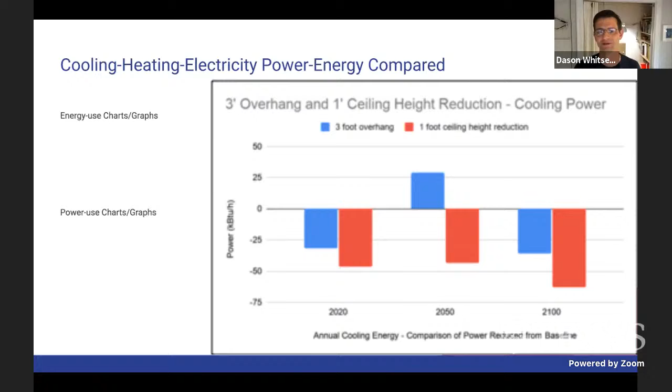Oh, that's interesting. I don't have a good answer for that, but I do have a question: do you have any hypothesis on the general anomaly between 2050 and 2100?

I've been thinking about that for a while now. I haven't come up with a confident hypothesis because I don't know enough yet. I just know it will get much hotter by 2100. I know from a researcher from Texas Tech, I'm forgetting her name, she did a project for the city of Austin projecting the temperature for 2050 and 2100. It's going to get much hotter with the humidity staying relatively the same, and the rainfall is going to become more concentrated, but the total amount of rain is relatively the same.

Wait, rainfall more concentrated between 2050 and 2100? No, sorry. The amount of rain we're getting now up to 2100 won't increase severely, but it'll be flash floods. The rate of flash floods will increase because the rain will be concentrated in shorter bursts, is what I remember reading. It's going to lead to more severe rainstorms, but the volume of rain won't increase substantially, I think, is what I'd have to bring up from the research.

One possible hypothesis, could be correct or not, you'd just have to look at the weather files you're using. Is it potentially the prediction that between now and 2050 it gets hotter and sunnier, more solar radiation, and between 2050 and 2100 it continues to get hotter but also cloudier, so the shading does less? That's sensible, yeah, but I used the raw IPCC weather files, so I haven't extracted them into human readable form. I haven't examined the cloud cover and solar radiation from them, so that would be the next step.

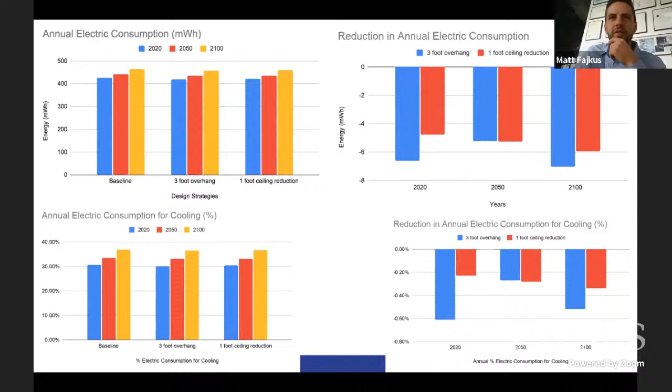And maybe this comes back now to the bigger topic. If you come back to maybe your very first slide, which is your title and or research question. I can't remember which was first. Which one? Okay, so maybe let's see.

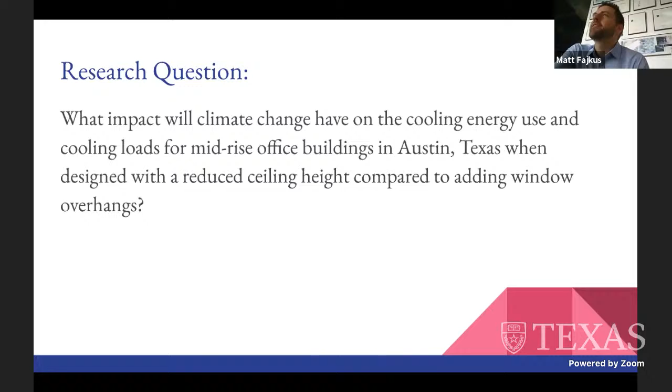Okay, I think one big difference between the two strategies that you were suggesting is that one is more readily a retrofit scenario. Shading devices and overhangs could potentially be a retrofit scenario. The other one is more of a ground up scenario when determining the plate heights, the floor to floor heights of a building. So I think maybe acknowledge that, and maybe go back to the actual title of your thesis.

And maybe that's even defined, maybe not within the title, but in how you explain this, of looking at two strategies, one that is more generative and integrated in the entire design process, and one that's potentially a retrofit strategy. That's maybe one way to describe these, because even if you were to find that these two strategies, if one delta were relatively the same as the other, one is much more costly to change or modify, or just can't be changed than the other. So I think framing that and acknowledging that is valuable.

So it comes back to circling back around to all of this and comparing, as I'm just reading it myself again, like in comparison to architectural intervention strategies, ceiling height.